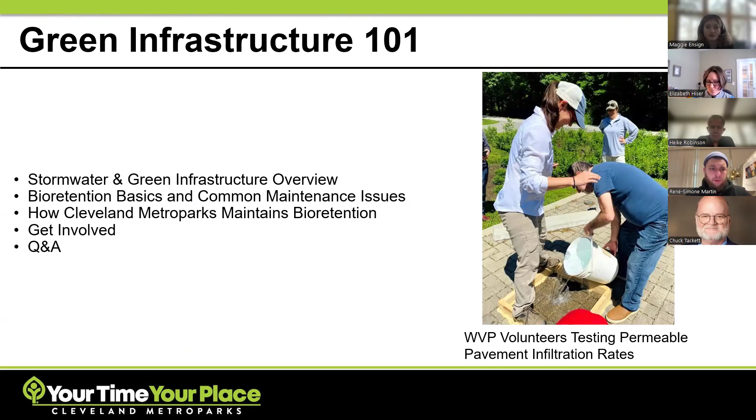Before we dive into some of the more nitty-gritty details, I want to give a little general stormwater background and explain why green infrastructure is important. Then we'll talk about bioretention basics, what they are, how they're designed, how they're maintained, common maintenance issues, and how Cleveland Metroparks has been working to maintain our bioretention, and how you can get involved, with time for some questions. I do want to recognize that in all of my previous roles, I've pulled together some of that content to make this presentation.

A lot of this stems from a municipal separate storm sewer system presentation series that we did way back when I was at Soil and Water, for various municipal employees as they were starting to maintain these different practices. Also from my time with Master Rain Gardener and just general presentations from the parks. So various partners have contributed to these.

So if you're not aware, stormwater is not just the rain or snow falling down on the landscape. It's what it's picking up on its way to our storm drains, to our streams, to our rivers and lakes. So it's that water that hits the hard surface and everything it comes in contact with on the way to our local watersheds.

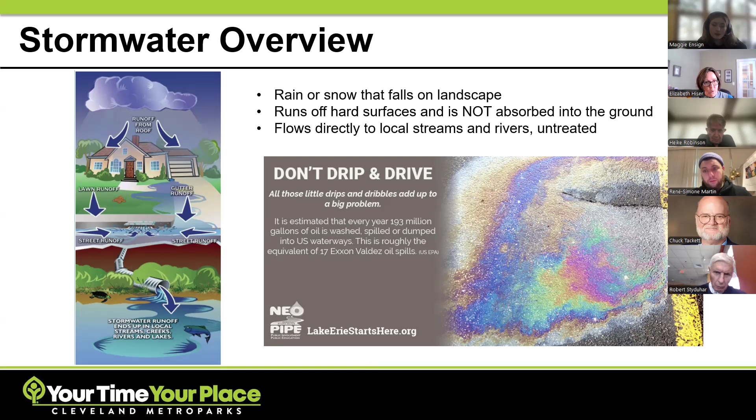I like to read this statement because it really shows the impact of all these little things happening that add up to big things. It's estimated that every year 193 million gallons of oil is washed, spilled, or dumped into United States waterways. This is roughly the equivalent of 17 Exxon Valdez oil spills. So it's just us forgetting to maintain our vehicles, and all of that throughout our landscape adds up to this big impact, which isn't great for our environment.

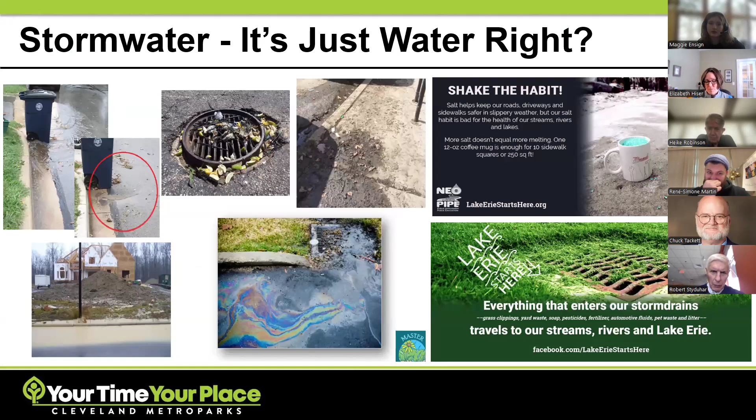So it's not just water, it's trash, it's debris, it's salt. We've got Winter Salt Awareness Week coming up next week. It's oil from your cars if you're not maintaining them. It's the soap you use to wash your car if you're doing that at home and not at a car wash. It's the sediment that comes off construction sites and grass clippings. All of those things add up to get into our waterways, just from the nature of running off the land.

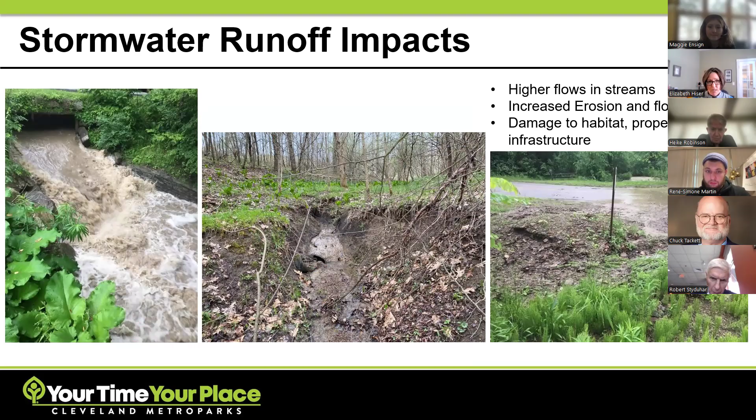So stormwater pollution at the watershed level is really the leading threat to water quality in our United States surface waters. In addition to water quality impacts, stormwater runoff also contributes to higher flows in streams, increased erosion and flooding, and damage to habitat, property, and infrastructure. Stormwater runoff is really exacerbated as we continue to develop and create more and more hard, impervious surfaces like roofs, pavement, parking lots, driveways, and roads.

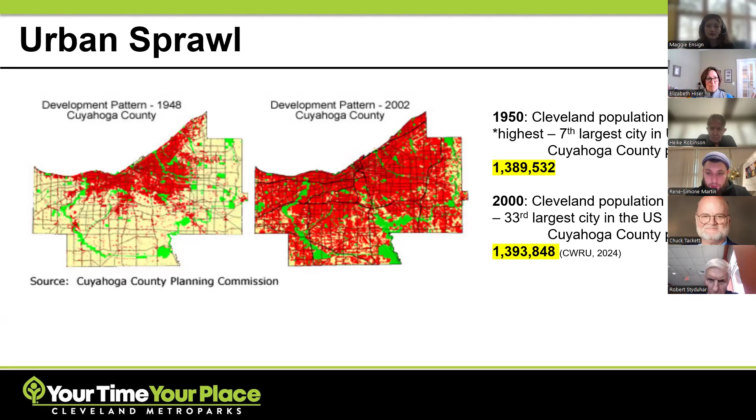I think this urban sprawl demographic shows that footprint has been growing. So even though our population hasn't really changed that much in Cuyahoga County, it's been spreading out from Cleveland. Some watershed studies have shown that as you get more and more of those hard, impervious surfaces...

What happened there? Excuse me, so sorry. No, that's okay, I lost my notes there for a second. I'm so sorry. Nope, you're good.

So impervious cover impacts, as we increase them, watershed studies have shown that... sorry, would you mind resharing your screen? I was making it so no one else could reshare theirs, we had a little technical snafu. No worries, I will find that Zoom setting. Technology. That was my bad for not making the proper settings. Thank you everyone for bearing with us. Can everyone see that now? Yep, looks all right, perfect. Thank you.

Back to impervious cover impacts. Watershed studies have shown that once you get to about 10 to 18% impervious surface cover in a watershed, your streams are going to start to erode and aquatic diversity is going to start to decline.

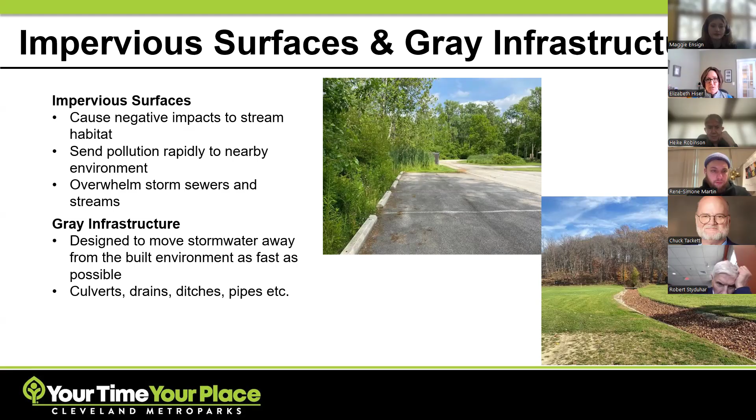The new way is trying to look at our natural landscapes and trying to make those areas where we have development act more like nature. So slow that water down, filter out the pollutants, improve water quality, and provide additional benefits. Work with nature to reduce and treat our stormwater at the source rather than pushing it down to the next person. And how do we do that? We use different green infrastructure.

So rain gardens, green roofs, rain barrels, downspout disconnection, pervious pavement, etc. That's what you can do at home. You can build a rain garden. You can use a rain barrel. You can replace some of your impervious surfaces with pervious surfaces, plant more trees. Trees are great. And so we do that at Metroparks.

We try to work with our upstream neighbors because we are in the valley. So we're getting all of that upstream water coming our way. We want to work with our partners and our neighbors upstream to help do that at home.

I work at the Watershed Stewardship Center, which is a regional demonstration site for stormwater management. We've got green roof, bioretention, permeable pavement, cistern, rain chains, every stormwater control measure you could possibly imagine. We're trying to demonstrate how you can do that, not just at home, but also in more municipal setting levels. So a demonstration site for how to use these and how to better treat our stormwater.

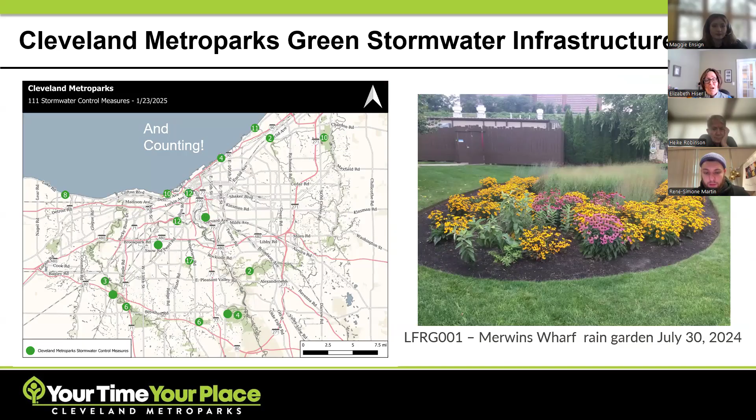We have, as of just recently, 111 stormwater control measures throughout Cleveland Metroparks and counting, more coming to Dunham Park soon. So we're really having to figure out how to maintain these and how to do best practices.

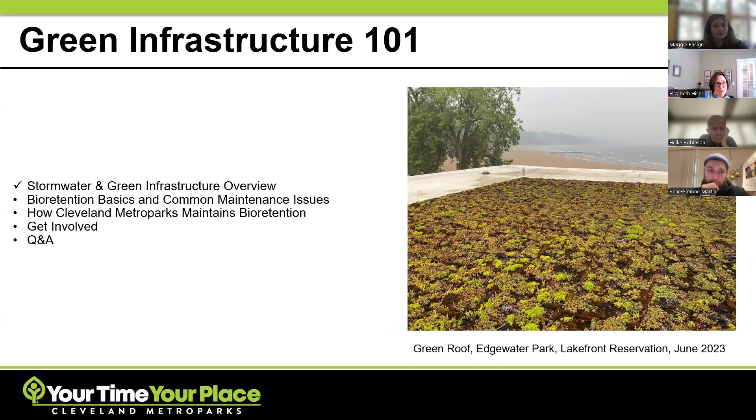So that's, high level, what is stormwater, what is green infrastructure, starting to get into why Metroparks is involved with it. And now we're going to talk in the weeds about bioretention, what it is, how it functions, how it's designed, and how you maintain it.

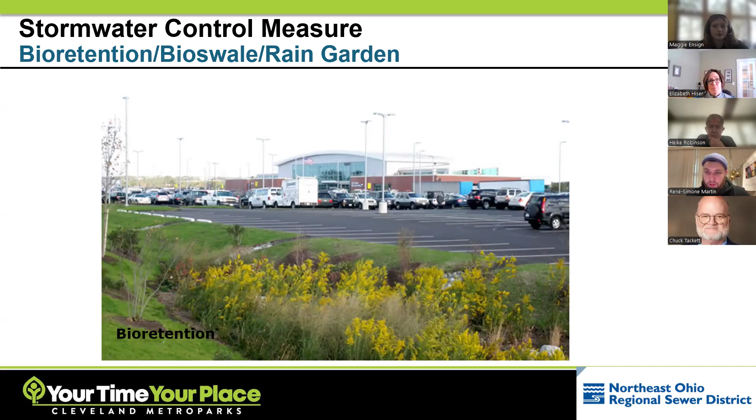So bioretention is basically an engineered bowl for water to temporarily store water that's coming off the landscape. It can look many different ways, but the idea is water comes down from the sky, hits your pavement, runs off to this designated area where the water is going to be filtered by plants and different soils before it moves out into our drainage ways slowly and less polluted.

So it can look all kinds of ways. You can have grass, you can have bump outs along the roads. But what's the purpose and how are they designed?

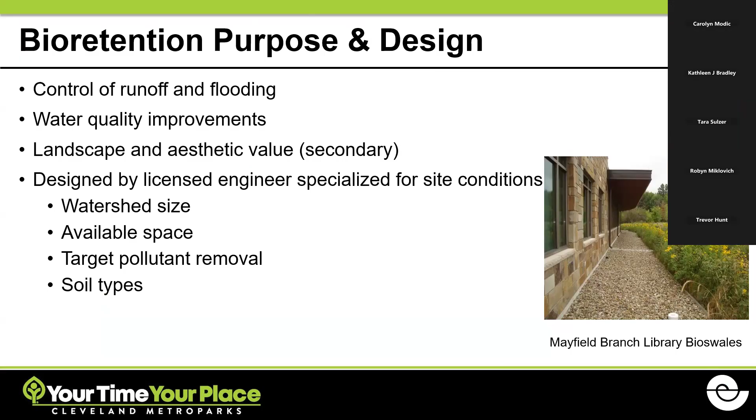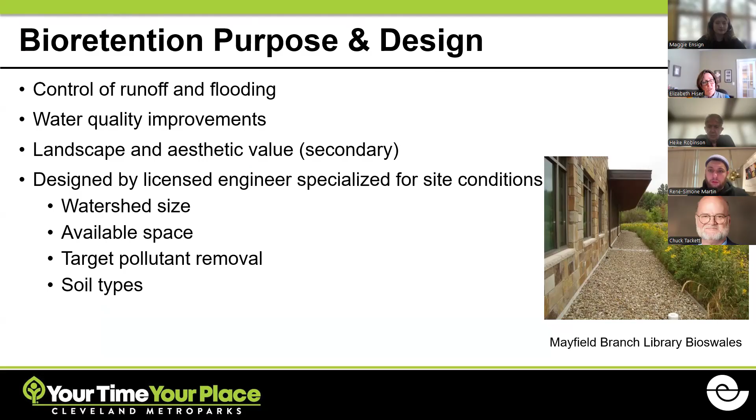So they're designed to control runoff and flooding. We want water quality improvements from these. These aren't just for storage. They're part of the landscape, so they should look good, obviously a secondary value. And the key thing with these is they're designed by a licensed engineer for the special conditions for that site. So you need to know what size is your watershed, how much space do you have to put in your bioretention, what pollutants are you trying to address on the site, and what are the soil conditions that you're working with, because those will all affect your design.

Thanks to the Sewer District for this awesome graphic. Hopefully it will work. It shows our rain coming into our basin, and then slowly infiltrating down through a layer of mulch, bioretention soil, filter layer, and some gravel bed, and hopefully getting into our groundwater and native soil.

But for those that don't, it kind of starts to temporarily store, and then through a perforated pipe and outlet will overflow to the local sewer or environment by design. And there's always an emergency exit for when we get those gully washers that overwhelm the system, because we don't want to flood the nearby infrastructure.

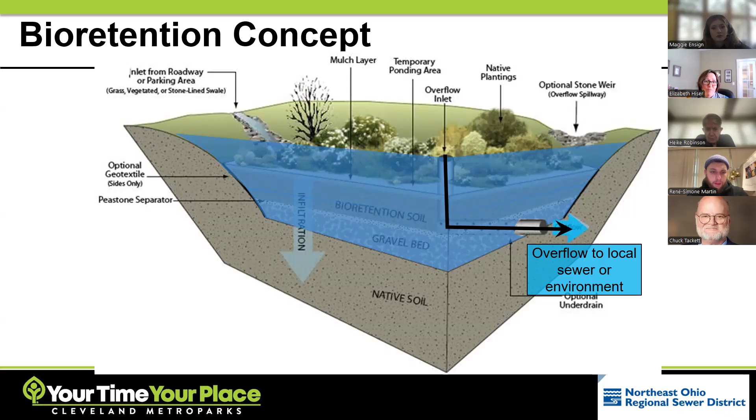So how do they work? They use soil media, mulch, and plants to reduce runoff and treat stormwater runoff. Basically, this happens from all those pollutants that are in that water coming into the basin. They settle at the top. Microbes help break down different pollutants. Plants are uptaking nutrients, phosphorus, and nitrogen. You're getting infiltration into the soil as well as temporary detention. So these really are addressing both flooding, water quantity, and quality.

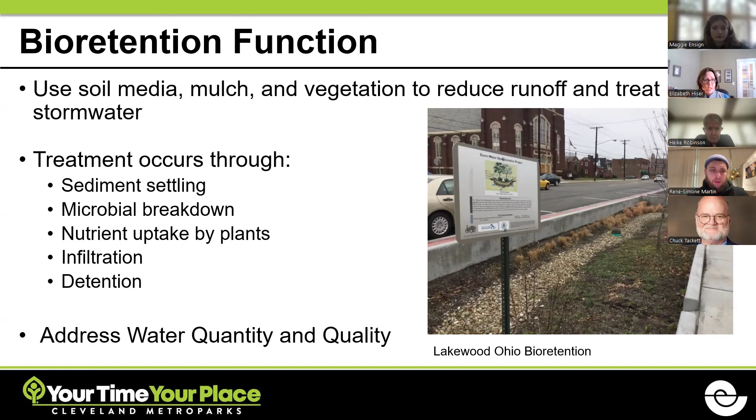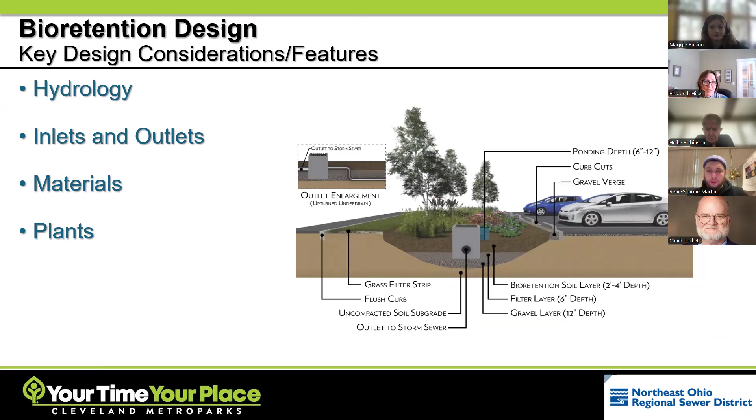Key design features, what's coming at you? So what kind of hydrology do you have? Is it a parking lot that you're treating? Are you treating road runoff? Size of your parking lot? How are you going to have water come in? What do your inlets look like and your outlets? What materials are you going to use? And what plants do you want? And we'll talk about how plants can really impact your maintenance.

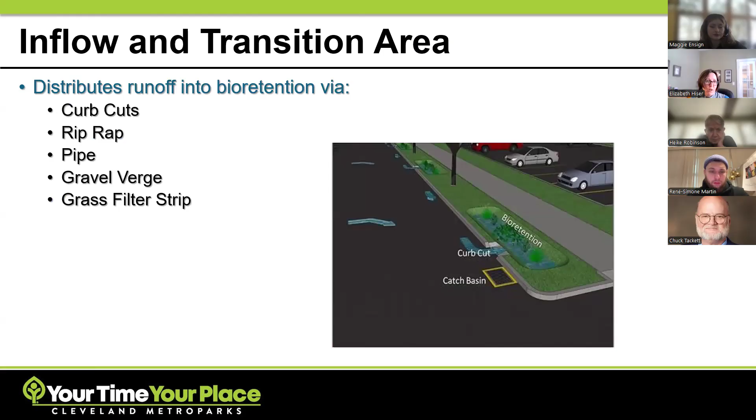So inflow and transition areas, these are often high maintenance areas because it's where water's first hitting the practice. Different things you can use: curb cuts, so just a notch in the curb that lets water in. You can line that with riprap or rocks to help prevent erosion. You could have a pipe coming into your basin. You could have a gravel verge or grass filter strip just to help slow water as it comes into the practice. That's the inlet. The basin or the depression or pit, this is where your water is going to hang out.

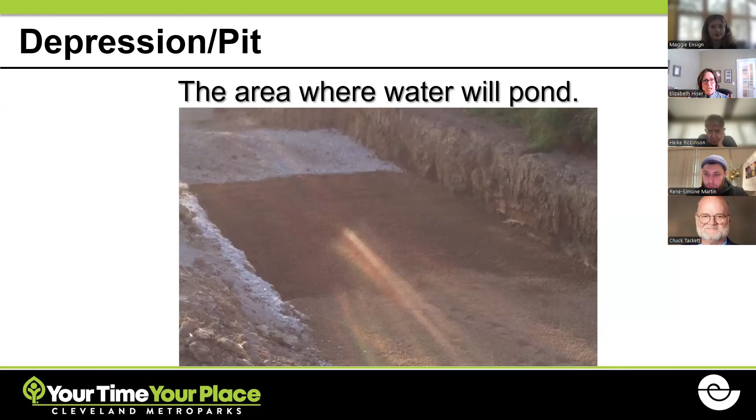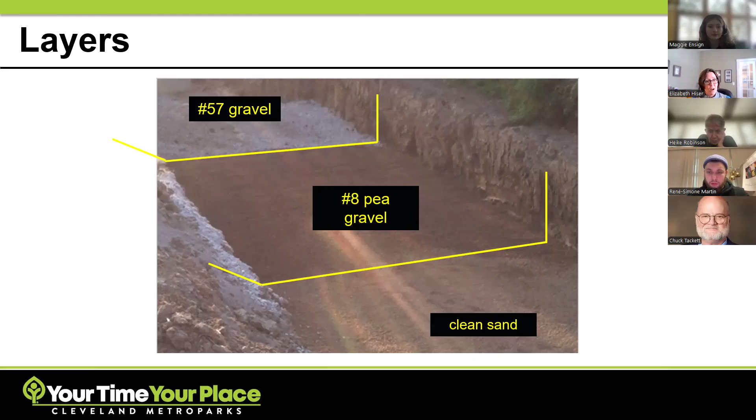And this is various layers. I like this picture because they're demonstrating all of them in there. So at the very bottom, you've got that 57 gravel, so those are like golf ball size aggregate, clean. You're going to have a filter layer that prevents any sediment that does get through your top layers from clogging that gravel layer, so pea gravel and clean sand. And then above that, you're going to have a custom soil mix that's really designed for infiltration. So think more sandy, less clay, less silt. We really want low levels of those fines that might stick together and clog, and more sand and a little bit of organic matter to support your plants.

So this is what that looks like in a cross section. You've got those filter layers and washed rock. We've learned lessons since we started doing this at the beginning. We used to use filter fabric, that landscape fabric, as a filter below that bioretention soil. And what we found was they became a clogging layer. So as those fines that come in from the landscape started making their way through your soil, they were settling right on that filter fabric. And then you have a pond instead of an infiltrating practice, which was not good.

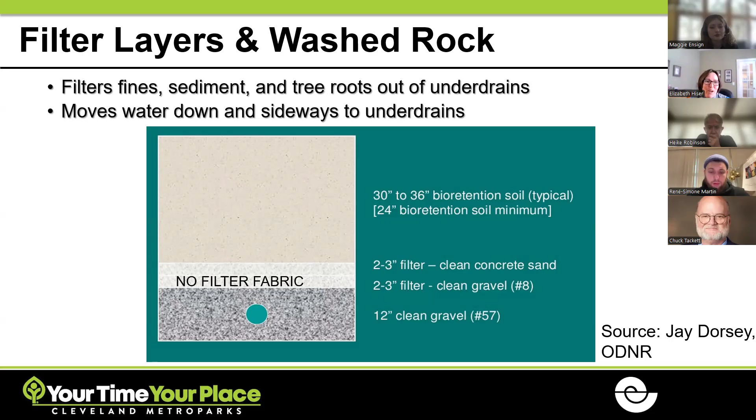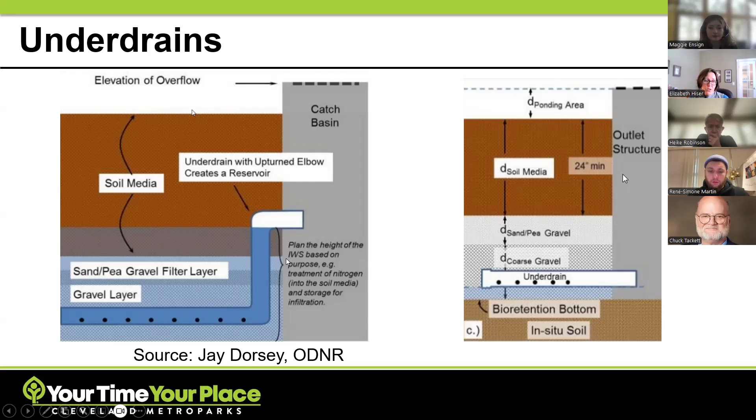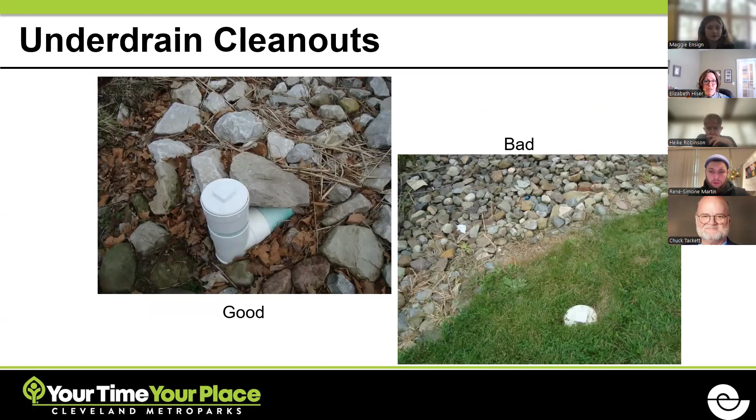So these layers are designed to move water down and sideways to the under drains. The under drains are going to have a perforated pipe that lets some of that water out to an outlet if it doesn't infiltrate into the natural soil. They can be upturned, like the picture on the left. That's more for if you're trying to treat nitrogen, because it'll hold water for a little longer before it lets it escape the practice. Ideally, your bioretention has under drain cleanouts because pipes get clogged, as we know. So ideally, you want that to be elevated, visible, and able to access it. For when something gets clogged, you want to be able to do something about it. You don't want it flush with the ground where you can't really open it.

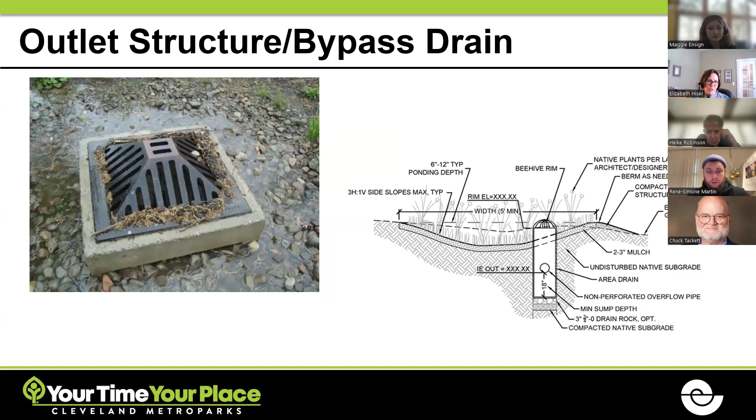And then our outlet structure. So we want these to capture those events that are too large for the design of the practice. Most of these practices now are designed for around 0.9-inch rain events. So if we get a 2-inch rain event over the course of 24 hours, that's going to overwhelm your system. You need an exit strategy, just like your bathroom at home. If you got distracted while you were running the bath, that little device that prevents you from flooding your whole bathroom, think of that for this. So it's really a place for that extra water to go. And then inside that outlet, there'll be that pipe that goes out to the system. These have to be elevated. So we want water to hang out in these practices. We want them to hang out there, slow down, infiltrate slowly.

We don't want them to just bypass the whole practice and go straight down the outlet, so they really need to be at least 6 inches above that level of mulch. That's a pretty common issue we see with installation—for some reason installers just want to put these flat with the practice.

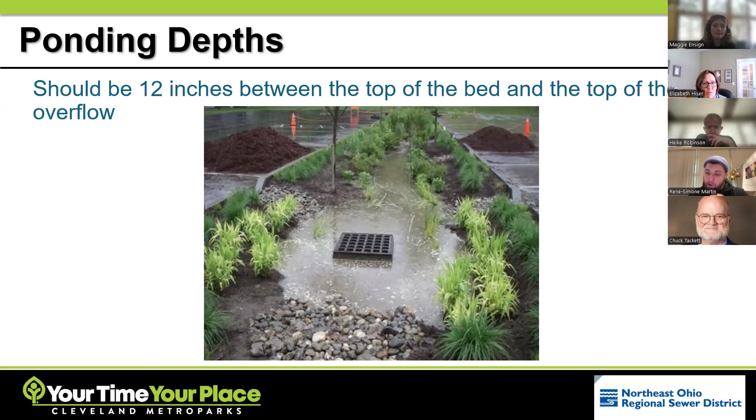Mulch, ideally you want double shredded hardwood mulch because it sticks together and doesn't tend to float as much. You don't want pine. A 3-inch layer is pretty good. It helps prevent weeds, adds organic matter to the practice, helps the plants and your soil, and conserves moisture during dry weather, cooling the soil. A lot of people just like the look of mulch, so it makes it look nice and tidy.

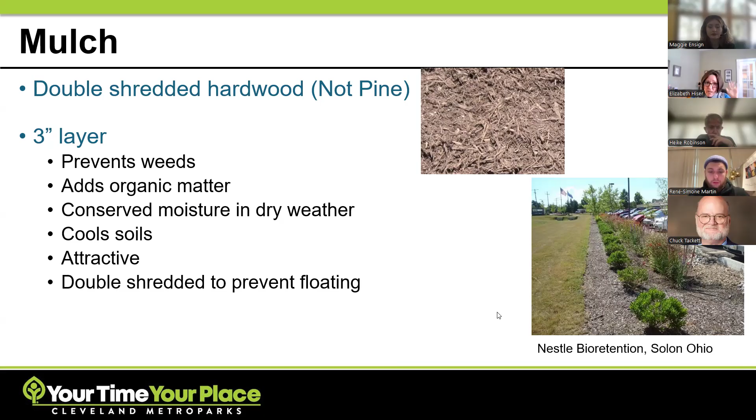I like the example here of Nestle, their bioretention—it looks very clean, and as mentioned, double shredded to prevent floating. You can have practices without mulch, but they've got to be completely stabilized by plants—basically a green mulch.

And then your plants—your plants are important. They're going to uptake your nutrients, soak up some of that water, and help stabilize the basin. And hopefully if you did it right, they look good.

So these are not just everyday plants—you can't just put your favorite plant in bioretention. They really have to be plants that not only tolerate being inundated with water temporarily, but also tolerate when it's not wet. So floodplain species tend to do good, and species that don't really care about anything tend to do good—so our generalists tend to do pretty well.

A lot of prairie species—ideally you want to use native species, just better for the local habitat, and they do pretty well. If you're in a place where you need something to look really nice and tidy, maybe consider cultivars or nativars. You can use trees and shrubs, you just don't want ones that are too big that they'll fall over—these are pretty loose soils, so you need something that's sturdy.

From a maintenance perspective, it's best to really think about where you're going to plant and the patterns you're going to plant. Keep the same types of plant together, group them—it makes it easier to remember whether you actually planted that plant or whether it's a weed in early spring when everything tends to look kind of weedy.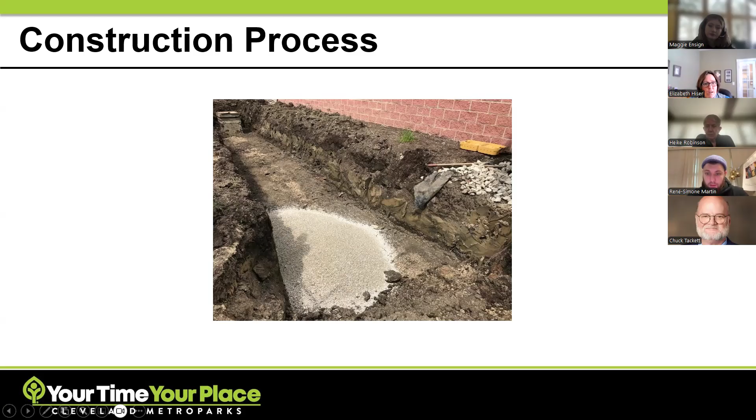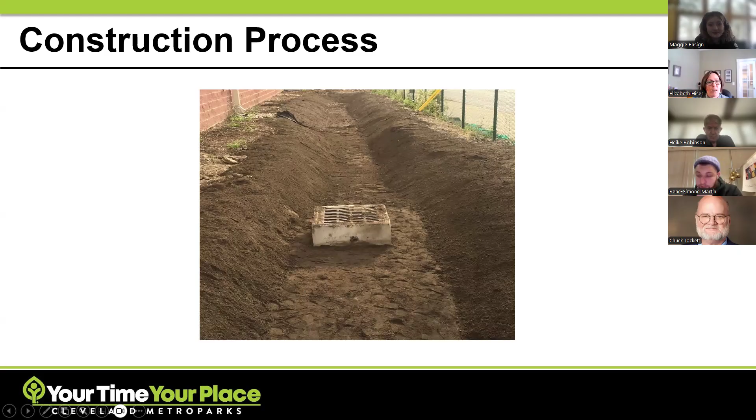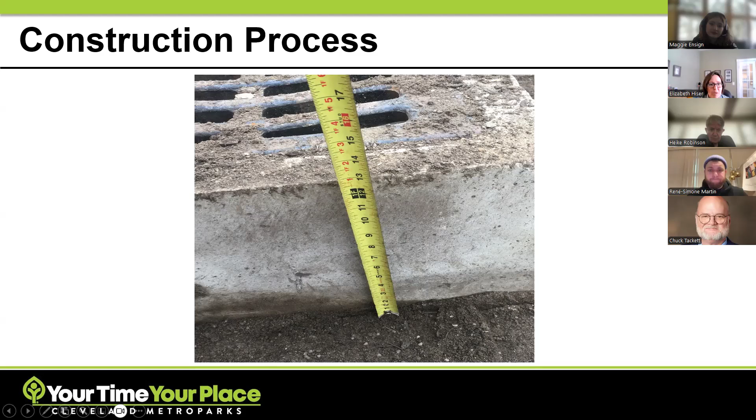So really chunk up the bottom, add your washed gravel layer, and above that you've got your filter layer. These guys were really happy that I made them redo this—it was about 90 degrees that day. They weren't thrilled with me, but do it right the first time, they say. So you've got your filter layer, and then your bioretention soil mix—that nice sandy, little organic mix. On top of that, you're going to have your mulch. Notice that outlet with at least 12 inches of elevation, making sure the water hangs out here for a little while.

So that's what they look like, how they're designed, how they should be constructed. Now we have to maintain them. These are not set it and forget it. A lot of people were sold that—they're like, there's native plants, they'll be fine. Turns out not so much. Everything needs maintenance. So why do we have to maintain them?

Usually they're the only means of drainage in the landscape. If you're putting these in because you developed in a municipal separate storm sewer system, or MS4, you're legally required to maintain them—you have to treat your stormwater runoff now in urban landscapes. They're an investment, it's not cheap to put these in. Most landowners want their investments to have returns, so you want to take good care of them so you're not redoing them down the line. And they are part of the landscape—they should look good.

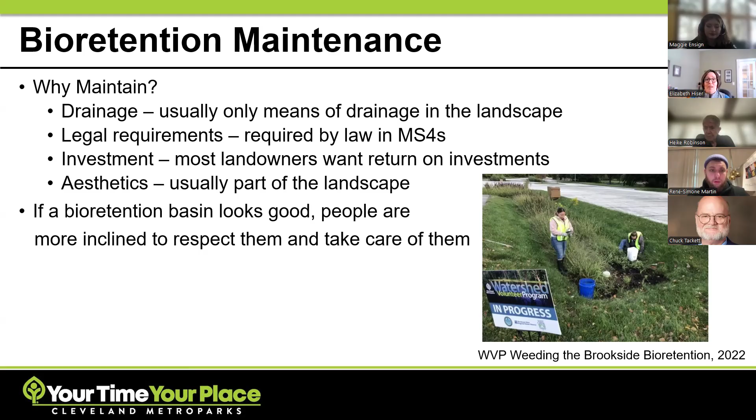I'm a firm believer if your bioretention basin looks good, people are more inclined to care about them and respect them, and maybe implement them at home in their own landscape. So it's not the same as our typical landscape maintenance. Otherwise, I feel like we wouldn't have so many issues maintaining green infrastructure.

Mow, blow, and go doesn't really work for bioretention, especially if it's not just like a grass bioretention. Neither does spray and pray. We're really trying to make good water quality come out of these, so using chemicals on them is kind of antithetical to what the purpose is.

You need to train your staff to recognize early signs of problems, get at things before they get out of control. So looking for erosion, looking at your outlets before or after rain events, looking for compaction issues, keeping out invasive plants, just good housekeeping, just preventing those big problems.

You can do that by inspecting it routinely, ideally at least once a year. Twice a year is even better, spring, fall. Use a maintenance checklist so you don't forget anything, and really focus on preventative maintenance so that you can avoid costly repairs in the future.

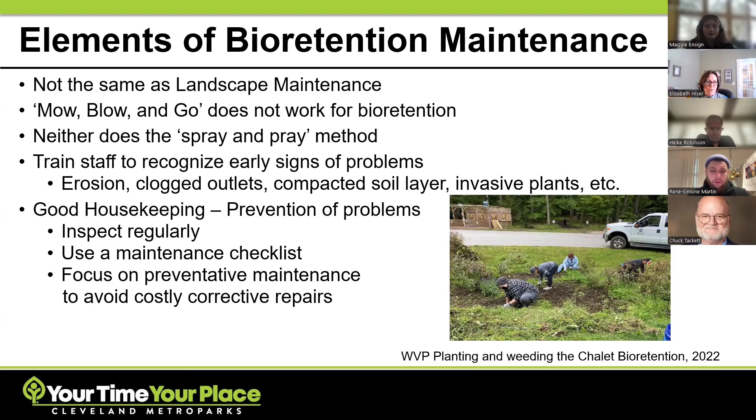So at Cleveland Metroparks, what are our maintenance goals? We want these to function. We really are advocates for doing right to our watersheds. As mentioned, we're a very stream intensive Metroparks. We have over 1,000 miles of streams.

We're in the valleys of everything from Rocky River on the west side all the way over to Chagrin River on the east side. And we really do get hammered by all these rain events. So we want to walk the walk as well.

So we want these in our landscapes to function. We want them to look good. We want to inspire stewardship, and we want to inspire people to have these in their own landscape. We need to prevent invasive species, and we'd like to see co-benefits. You can get the stormwater management side of green infrastructure without the habitat, but we'd really like to see both.

Managing invasives. So especially in those bioretention areas that maybe aren't front and center and are closer to our wild landscape, we got to make sure that we keep the invasive species from coming in.

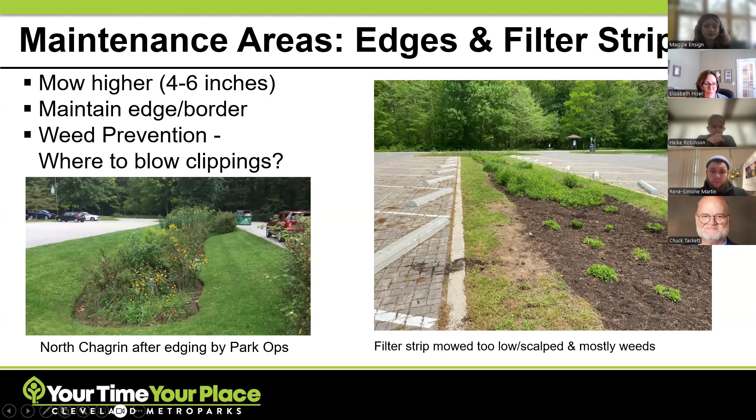And then you do have to be mindful of when you're doing the edging and when you're blowing off your parking lots, where are you blowing those clippings, because you don't want to contribute to more weeds in your bioretention. So making sure you're not just spreading the weeds to where you're going to be doing your weeding project next month. Looking for our inlets and our outlets.

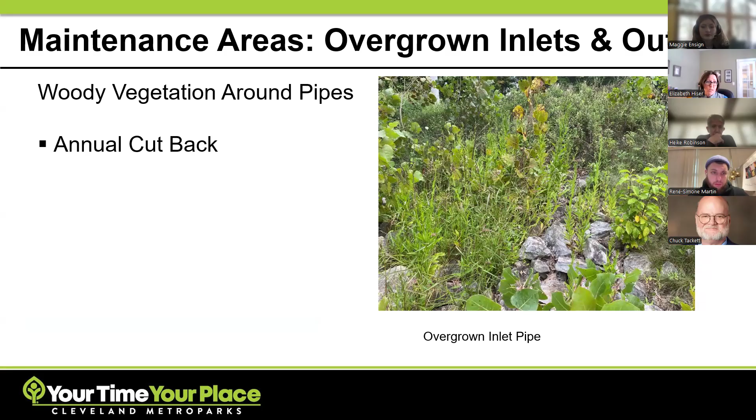So just keeping the spaces where water's coming in and out cut back so that you can get to them if there's maintenance issues. So at a minimum, an annual cutback around infrastructure.

Sediment, these are where sediment's going to go in the landscape. They're also the enemy of your practice. The more sediment that's getting in your bioretention, the more likely it's going to get clogged and eventually fail, and not be as effective. So really getting at it before it gets into the practice.

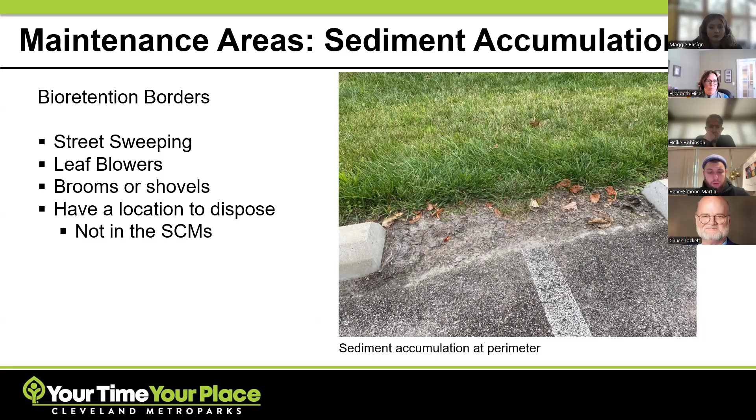So this is a good example of sediment accumulation at the perimeter, scooping that out with a shovel, getting it out of there, disposing of it properly. Just regular street sweeping around it, leaf blowers, and having a location to get rid of it, not just putting it somewhere else where it's going to end up back in the bioretention.

Slopes and stabilization and erosion are a big one. If you are trying to treat a lot of runoff in a big parking lot and you didn't have much space for your bioretention, so you have these really deep, steep bioretention, maybe consider rock instead of sod, and mulch for your stabilization. This was one of the ones we put in at Brookside, where we were experiencing that we had to come back in and put rock. The grass just wasn't cutting it. The slopes were too steep.

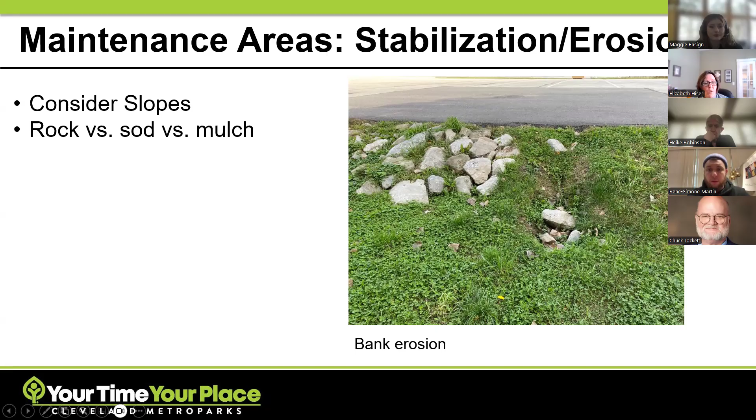Damage in infrastructure is more non-routine, hopefully. If you had one of those outlet cleanouts put in low to the ground and it got damaged by a mower, now you need to repair it because you've just got a space for anything to get in and clog up your system.

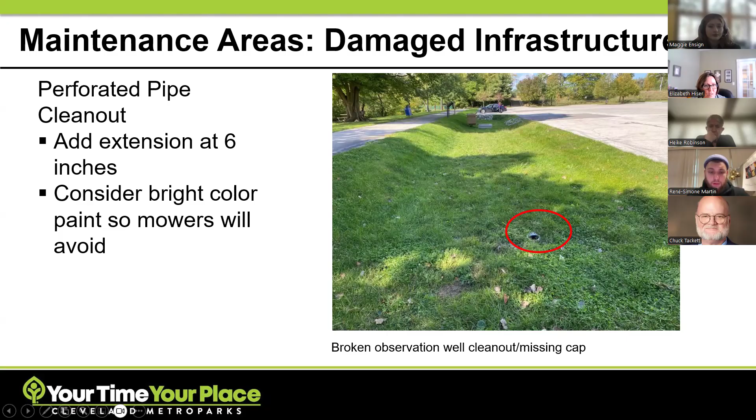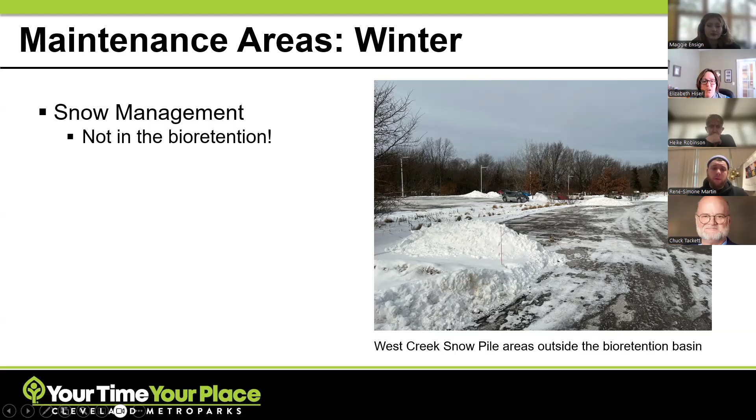Then there's winter. I took this picture the other day. You never want to forget about winter with your bioretention and snow management. The key is don't put your snow in your bioretention. This is a good example at West Creek where they have designated pile areas for the snow alongside, but not in the bioretention. Pushing snow into your bioretention would compact the practice, the salt would end up in there, and most plants aren't big salt lovers. All the pollution on the snow would just end up right in your basin. So have designated snow areas, not in your bioretention.

All right, so that was the nitty gritty. Now we'll talk a bit more about how this all gets done. I just told you we have 111 stormwater control measures, so how are we maintaining them throughout the parks?

Seasonal staff: for the past 3 years, we've had support from the Northeast Ohio Regional Sewer District to beta test the use of green infrastructure seasonals—dedicated staff during the summer with an interest in plants and horticulture—to help our park maintenance teams do the routine maintenance that has to occur.

This is an example from the past 2 years where we had 2 seasonals. Around 1,200 to 1,300 hours of effort went into inspections and maintenance throughout the park. The year prior we had 1 seasonal for a very short window, but he helped us get started, coming out of COVID when things were looking a little rough.

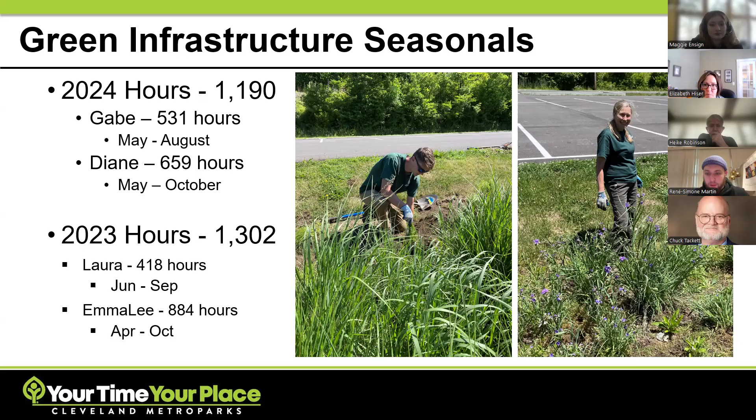So we've really been working on getting back to baseline the past couple of years, and I think last year we started to figure that out. Going forward, we've recognized the need for dedicated staff, and thankfully the sewer district, through our stormwater maintenance reimbursement fund, is going to fund a part-time position to help with the administration end of it, and they'll have seasonal support as well. I'll still manage that team to help our park maintenance.

We also have volunteer services groups—groups that say they want to help out the Metroparks for a day—who come in and help with some of this non-routine maintenance. West Creek Conservancy, our partners, we've helped out a bit with their bioretention. And the past 2 years we've had a really good relationship with the Northeast Ohio Regional Sewer District, where we try to do cross training with their staff since they're also maintaining a lot of these large bioretention areas.

Paul Kovacic, who I think was on today, he and my staff have been swapping and doing some cross training. So it's a village, I guess, is the point—it's not an easy job, and it requires attention.

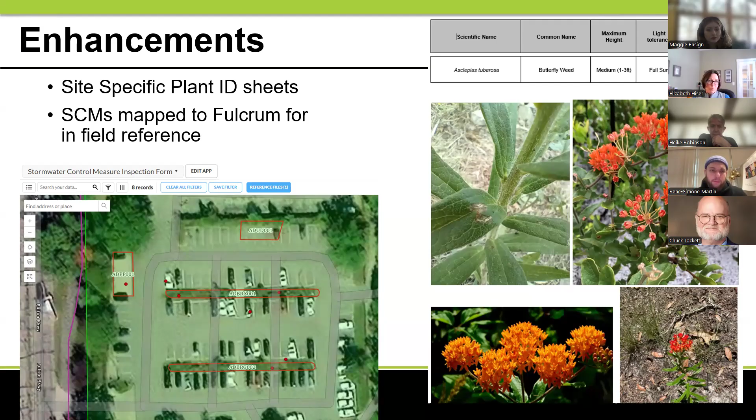Some enhancements we've made to help staff in the field when they have questions: specific plant identification sheets for the plants in each practice. We've mapped all of our stormwater control measures and use a mobile application in the field to track time spent on maintenance and what kind of maintenance is being done. That also helps them know where they're going, what practice they're looking at, and the plans for it. And there are some lessons we've been building upon and trying.

We've had some sites that were great, wonderful, colorful, and beautiful on planting day, but a little overwhelming later in the bioretention life. So we've tried to narrow down our planting palette by looking at our landscaping for biodiversity document, our master rain gardener list of plants, and the Milwaukee Metropolitan Sewerage District's green infrastructure resource, which lets you filter for green infrastructure plants. We combined those lists and looked at where all three had the same plants to narrow down choices for design going forward.

Our goal is really to limit to 2 to 3 flowers at most—I wish we could do more—but really focus on sedges or grasses, which perform really well from a nutrient uptake standpoint and are easier to maintain and identify, plus one tree or shrub species. So we're trying to keep the habitat benefits while keeping it simple for maintenance teams to know which plants are supposed to be in the basin and which ones are weeds.

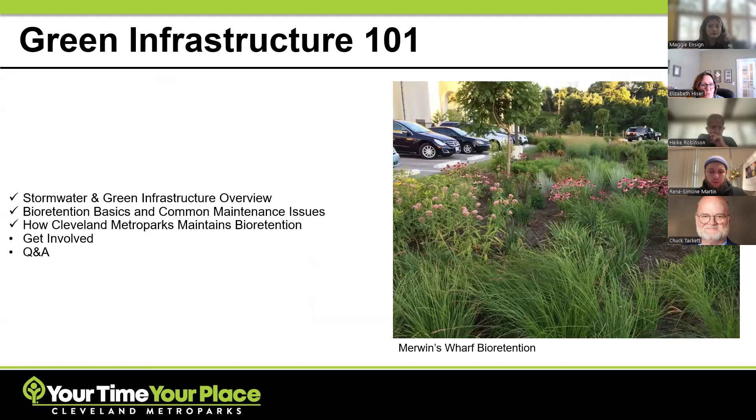Next, I'm going to talk about how you can get involved. So, shameless plug for our Watershed volunteer program, who I see many of you are here today—thanks for joining us. Since 2012 we've been running a program out of the Watershed Stewardship Center where we connect stewards who want to learn about watershed theory and want to give back, to do restoration, learning, monitoring, and outreach throughout the region.

We specifically do a green infrastructure gardening series with this program. So even if all you want to do is weed the bioretention, I'm sure we'll have a similar series this summer where we do about 8 weeks in a row, going to 4 or 5 sites and hitting them twice so you can see how they look in early summer versus late summer and watch the trends. Then we have a lovely brunch at Merwin's Wharf at the end of the season to celebrate.

Do you want to do this in your own landscape? Shameless plug for Master Rain Gardener, which is one of my favorite programs. The winter online course is starting next Monday, and there's a winter in-person course in March in Highland Heights. It's soup to nuts—I think it's 5 classes. You learn everything about how to build your rain garden, how to design it, how to size it. At the end, if you build it, you get a little sign for your rain garden, and you put it up and educate your neighbors about all good things rain gardens and stormwater.